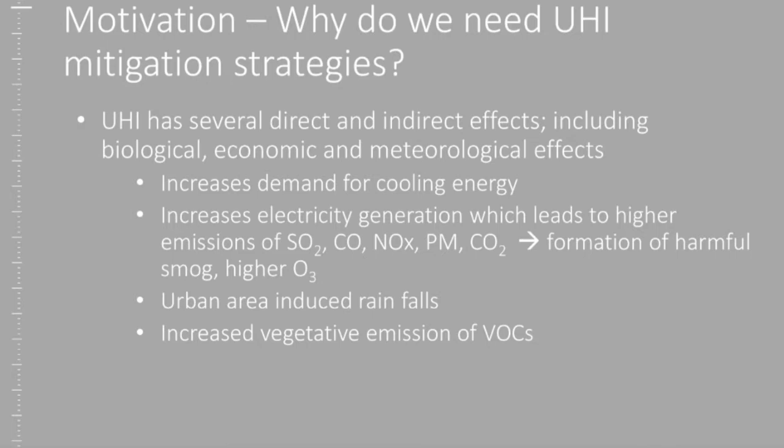And of course you also have increased biogenic emissions of volatile organic compounds. What I want to say is the vegetation we have in the city has evolved over millions of years, and it's not used to living in a city, in this specific environment, but it has to cope with it. We plant it there and expect some kind of benefit from it — we want it to cool down the atmosphere, to have a positive effect on our thermal comfort. But some of the plants don't like it there very much, so they are stressed, and they emit some kind of gases in order to protect themselves. These gases can often be precursor gases, especially in the case of isoprene, that can lead to very harmful construction of tropospheric ozone, O3. You see that a lot in summertime, or here maybe in wintertime, when you have lots of clear summer days — with all the solar radiation coming in, you have lots of production of O3 in the city.

So even if we say, okay, vegetation is one mitigation strategy we know already, we have to carefully think about what kind of vegetation, and in which sense do we implement it. And of course a city is not equal to any other city — Sao Paulo is very different from my hometown, Mainz, but it's also very different from other cities within Brazil. This is the approach of microclimate: we do not have easy solutions for a complex problem, and we need to account for that.

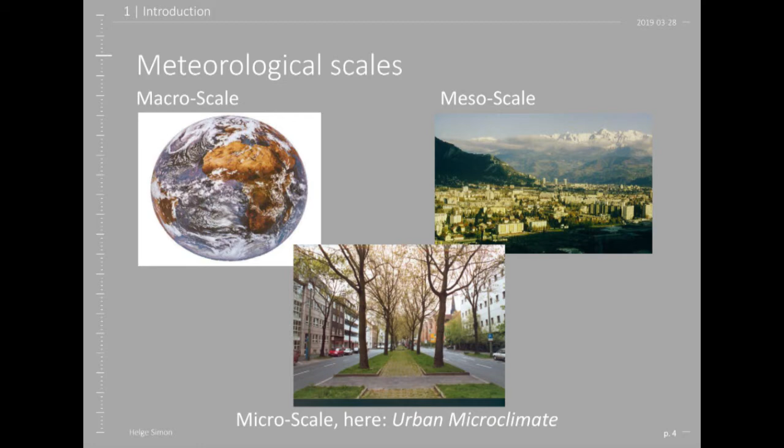So the microscale is the place where we live, and it's also the only place where we can make a difference towards global climate change. We cannot implement something on a macro scale easily. We cannot cool down all the oceans immediately. We don't have this kind of technology.

Maybe you've heard of some proposals to put huge mirrors in space. This sounds a bit futuristic, sounds like science fiction, and is of course very dangerous. There have been some articles recently about this.

So currently we don't have the technology to interfere with these scales, but we all have the chance to interfere with this space, to change the microclimate differently, to shape a better microclimate in our city quarters. This then goes back to the mesoscale because it changes the city quarter, and if you have many city quarters with a better microclimate, then we have a mesoscale feature. And if we've fixed a lot of problems on the mesoscale, it will propagate back to the macroscale.

So we really have to think of the microscale. Don't get turned down by the word micro - it doesn't mean it is micro important. It is macro important, but micro only in scale of dimensions.

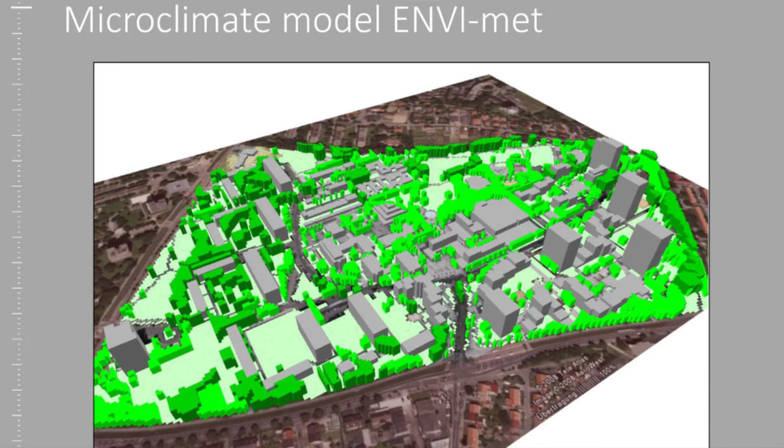So I want to quickly talk about a microclimate model that I'm part of the development team for. It's called ENVI-met, Environment Meteorology. You see a model area here, and it is basically a bit like Minecraft - you can think of it like Minecraft. You discretize the space in blocks.

These blocks can have different resolutions, maybe 2 by 2 by 2 meters, and then they can either be part of the atmosphere, part of a building, or part of the vegetation, etc. And you're able to replicate your model or your city quite accurately.

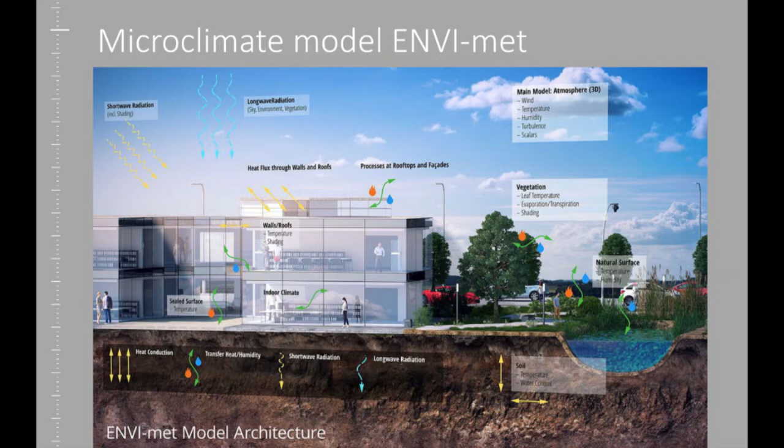And then the model is given some boundary conditions - maybe you want to simulate a hot summer day or something like this. And then the model will give you some prognostic output. It will tell you, okay, given this input and given the configuration inside your model area, you will see distributions of wind speeds, temperature, humidity, turbulence, other scalars, etc.

And in order to simulate very accurately, you cannot only simulate the atmosphere, because microclimates happen because of the interactions between different objects - between the atmosphere and maybe the ground surface, between atmosphere and the building surfaces, and of course between atmosphere and vegetation.

So in order to accurately replicate all these different features, to accurately model the microclimate in an urban area, you have to be able to accurately simulate the processes of vegetation - that being the leaf temperature, the energy balance of the leaf temperature. You have to simulate the evaporation, the transpiration.

So you need to know, okay, a tree is not something static, it reacts to the environment. So when it's too hot, then it closes its stomata - meaning it closes the small openings on the bottom side of a leaf, letting out less water.

Also it reacts, of course, to the soil. So if there was no rain for a long period of time, the soil gets drier because the vegetation is sucking water out of the soil. But at some point we don't have a replenishment because rain is maybe lacking, and then the soil gets dry and the vegetation cannot fulfill all its beneficial effects anymore.

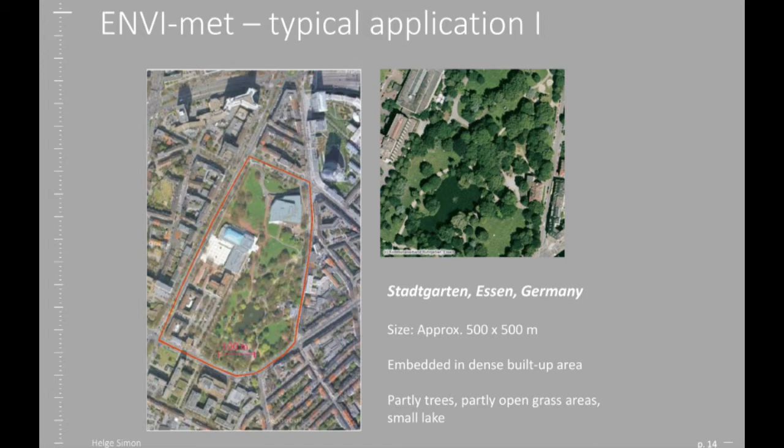So what do we typically have? A model area where we're interested in seeing some effects in the outdoor determined by changes. For example, we have a park here, and we want to know, okay, if I have this park, or if I reduce the size of the park or increase the size of the park, what is the immediate effect onto the environment?

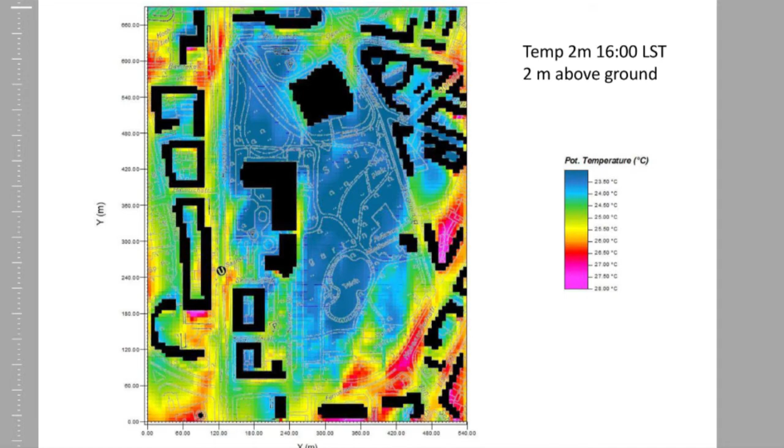We can have a look at the air temperature at 4 p.m., and you will clearly see inside the park you have lower air temperatures, and then on the sealed surfaces close to the buildings, maybe south-facing facades. This is in Essen, a city in Germany. The south-facing facades are hotter than the north-facing facades because they face the sun directly. You see hotter air temperature there. This is a very classical thing.

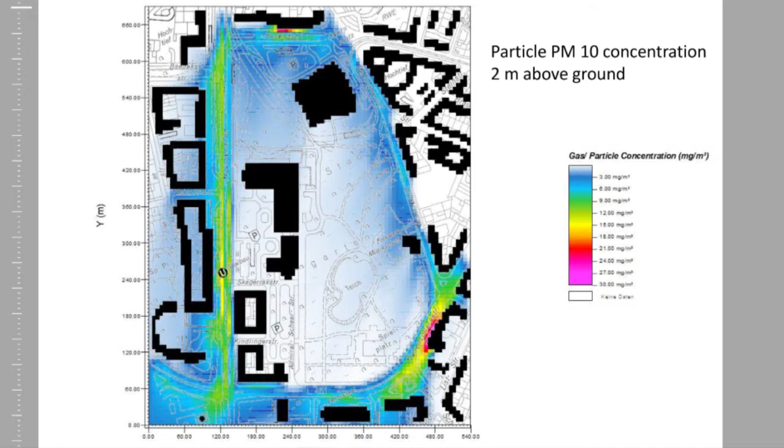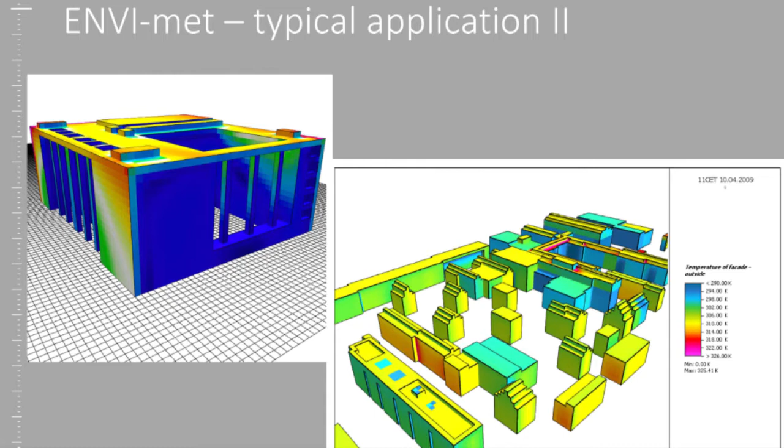There's another typical application where you're not so much interested in the outside, but more interested in the building envelope, the building physics. This means you digitize your buildings with a high resolution. This is a test area of the Fraunhofer Institute in Holzkirchen, and you will see something about this again in a second. So you maybe have a small model area with individual facade elements like glass, then concrete - a lighter concrete, a denser concrete - and inside these buildings you have different flats. This first floor, this third floor is separated into two flats. The second floor, the first floor too. There are two flats inside, so there are distinct air volumes inside.

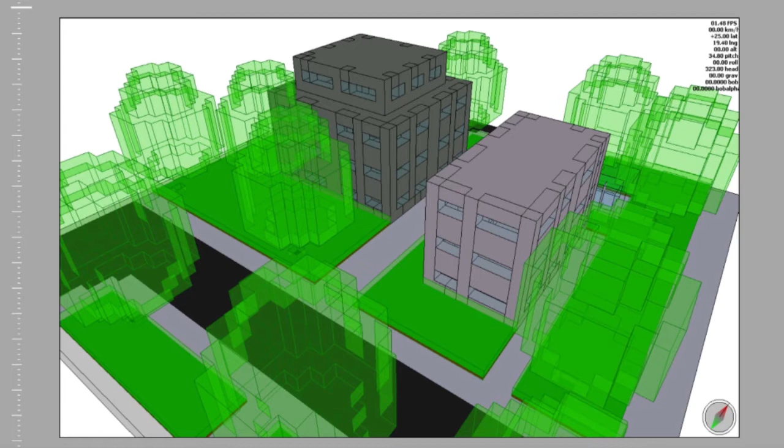When you then simulate, you can first have a look at the outdoor facade. Having a look at the outdoor facade, you see there was a tree in front of this building, and you can clearly see its effect. The solar radiation is being attenuated by the tree, so less solar radiation reaches the facade, and the surface temperature is lower. Then you also have the indoor air temperature, an approximation of the same, and you see all these individual flats carry a different indoor air temperature because they get different amounts of energy and react differently to it.

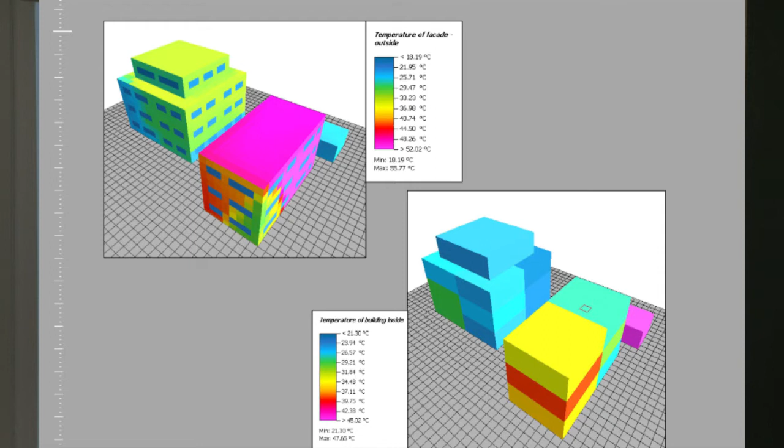Okay, so let's come to these mitigation measures. The mitigation measures I want to talk about are basically two things, and I think these are the two most dominant objects in the city. When you think about a city, you think about buildings - a city is mostly composed of buildings. And when you think about a city in the sense of urban heat island mitigation, you think about vegetation. These two things should be modeled quite accurately in order to quantify how much I can change, how I can shape, how I can better the urban microclimate.

In the first part, I want to talk about the building models, buildings and their role in the urban environment. Then I want to speak about building-atmosphere interaction, and go into the proposition that building performance simulations like EnergyPlus, like Trnsys, etc., can be improved by adding the microclimate, the local microclimate, to them, in order to then improve the outdoor and indoor climate efficiently.

In the second part, I want to go into urban vegetation and show you how a tree, not being a static object in our environment, is shaping the microclimate, and how we can model it accurately in order to give guidelines. Because urban planning is complex - you cannot give them 1,000 numbers, a huge Excel sheet or something. It should be clear guidelines on what to do and what not to do. So we need to model the differences in reaction of different trees quite accurately, and I also want to go into something quite recent that is very important when you do not have a lot of space, because tree vegetation takes up a lot of space. So what about rooftop and facade greening? What are the options here?

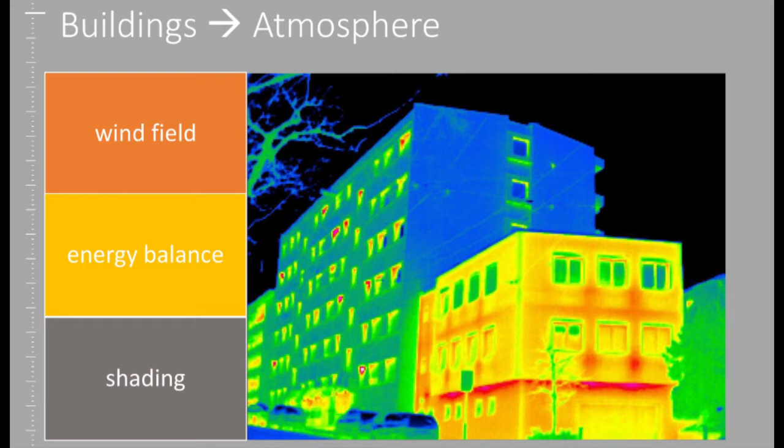Then, of course, comes something very important: cost. For most people it's hard to explain these things, as they are physical parameters, but costs everybody understands. So simulating costs is really important if you want to better the environment, because if you can express something in money terms, everybody will understand it and agree that we have to save money, because then we have more money for other things.

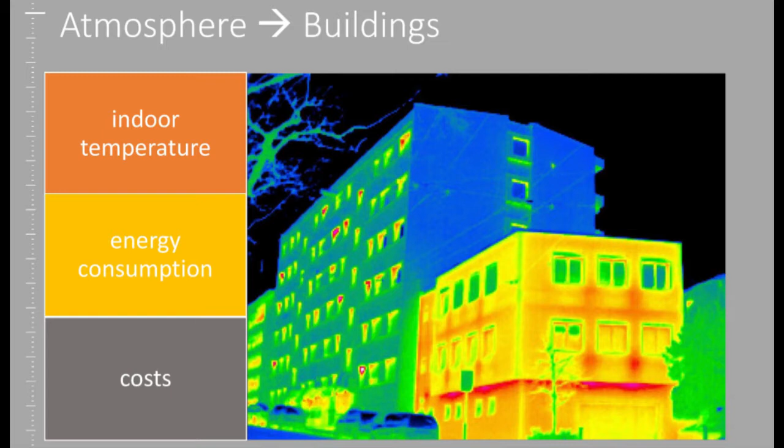So I want to talk about building performance simulations. Why do I think they need improvement? Well, I think they are a great tool, don't get me wrong. They are really good at approximating building energy consumption and the effects of building-related measures, such as more or less insulation, natural ventilation, etc. So they are a great tool and we should use it a lot.

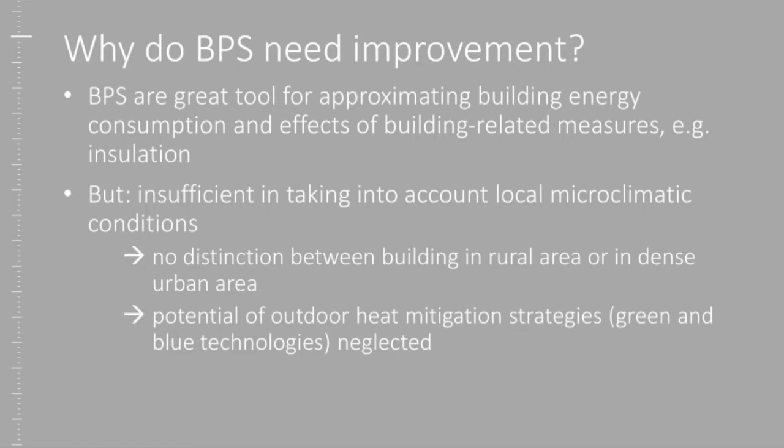But I say they are very insufficient in taking into account the actual local microclimate conditions. What you usually do is take some weather file, a year-long weather file, an EPW file maybe from EnergyPlus, with hourly values for a location, maybe Sao Paulo. You run your building performance simulation with this exact file. But something is a bit weird.

It sounds very easy, and this should make us think: why is it so easy? Is it that easy? No, I don't think it is. Because in these EnergyPlus weather files, there is no distinction about where your building is placed. You only have your building, and then the atmosphere coming from this static file—one file for Sao Paulo. But Sao Paulo has many different microclimates, so why do I only have one file?

It's not taken into account that maybe there are other buildings really close by, that there's a park next to it, or many trees next to it. This is not in there. So we need to improve there.

And of course, if we had all this information, then we could go back again and think: okay, maybe I don't need my AC that much, maybe I can skip some of the insulation, maybe I can use less or more reflective surfaces. So this again has interference with the outdoor environment.

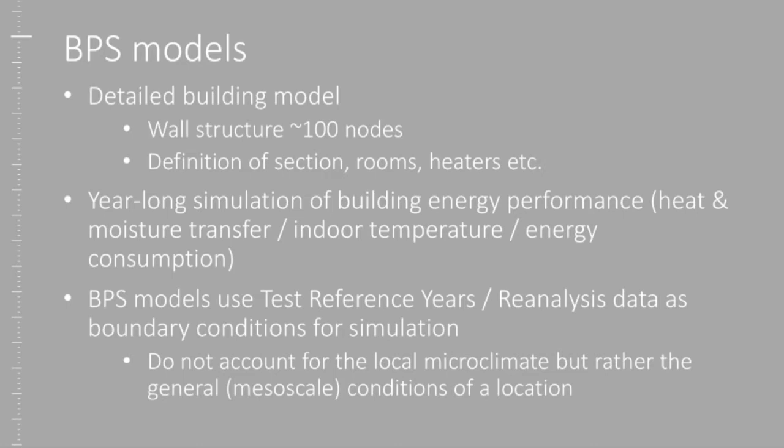Building models are great—they have a high-resolution wall structure, definition of sections of rooms, where a heater is placed, where circulation is, and so on. Using these year-long simulation files, often test reference years or reanalysis data, they're able to run for a full year. But, like I said, they do not account for the local microclimate, but rather a general mesoscale condition. Let's have an example.

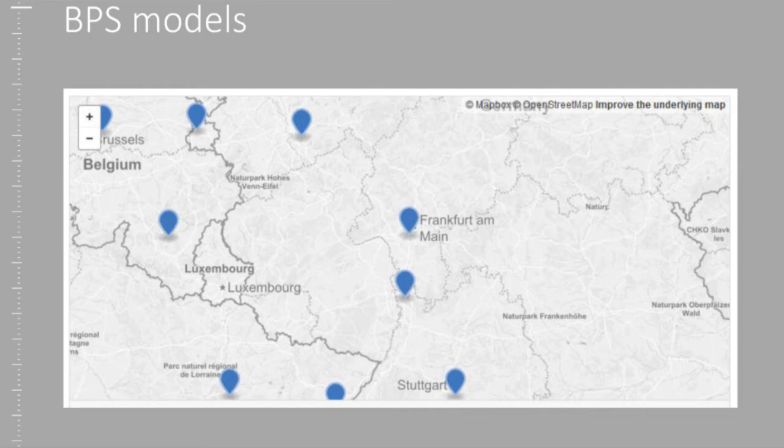So we don't have data there, not for a year-long hourly resolution. I'm not just saying this is a problem—I think it is a problem. But the fact that we have only one blue dot for Frankfurt, or only one blue dot for Sao Paulo, is an even bigger problem, because the really local effects are not captured in this single file.

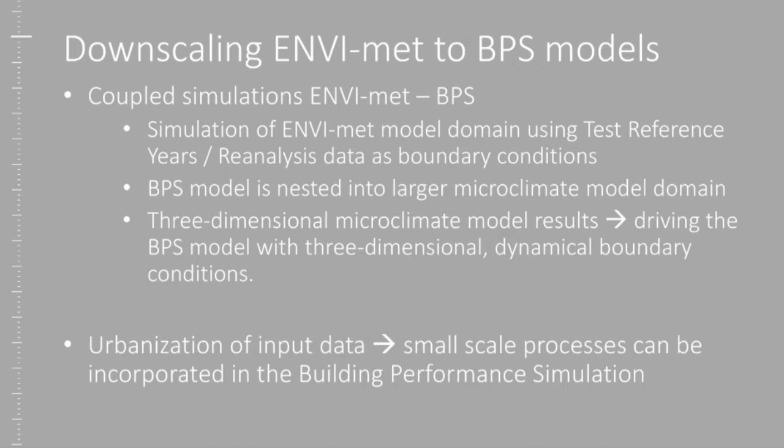So what do I want to do? What is something, I gave you a lot of problems now, but what could be one possible solution? Well, I want us all to think about using a microclimate model running with the EPW file, the blue dot data that now incorporates the mesoscale, the general conditions. You run a model area with a microclimate model, then use the simulation results to extract all the data of the building envelope you want to simulate in the building performance model, and put it inside Energy Plus, Trnsys, etc.

This would be a much better approach. It would lead to an urbanization, or maybe a localization, of the input data. It's not just generic data any longer, but really the data in front of your facade. And not just in front of the south, east, west facing facade, but in front of every individual facade element you simulated. So it's different in the lower left corner of the building than the upper right, and maybe the next 2 meters is very different again because there might be shade from a tree situated nearby.

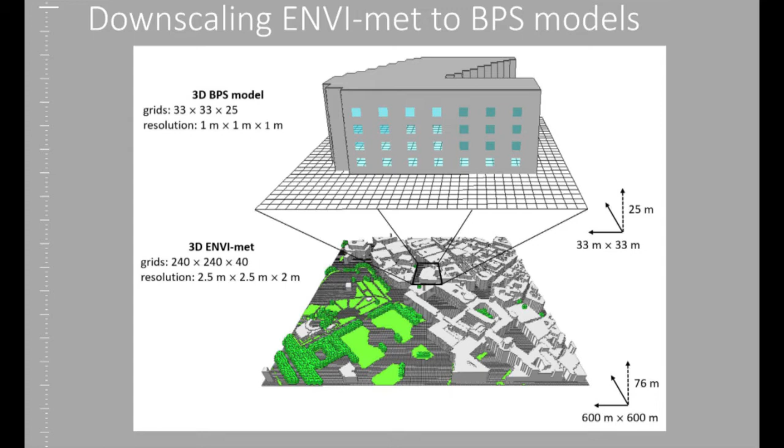So it would look like this. You have this model area, you run this in ENVI-met. And then you have the building that you are simulating in Energy Plus. But before doing so, you extract for every facade element the long wave radiation received, the direct shortwave radiation, shortwave diffuse radiation, the wind speed, the air temperature, the humidity, all the different parameters you need as boundary conditions for Energy Plus.

So that sounds simple. Why hasn't it been done? What is so difficult about this approach? Well, it's two things. First, to be able to extract this data and then use it in a BPS model, you have to simulate the facade, the interactions between the facade and the boundary layer of air right in front, very accurately already.

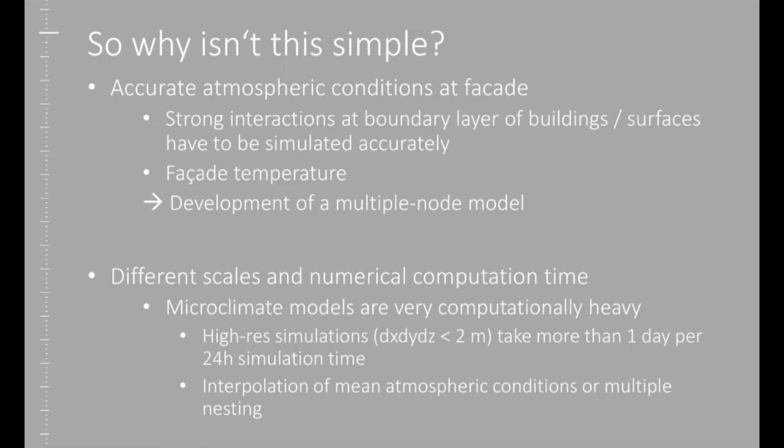Because if I want to use the air temperature as boundary conditions for the BPS, I would already have to simulate it accurately inside the microclimate model, because it's the data I want to use further. So if my facade temperature in ENVI-met is wrong, then the air temperature in front of my building is wrong, and this is the data I put into Energy Plus, so I've won nothing — I just wasted a lot of time. So this is something I first have to do: ensure that the facade temperature coming from ENVI-met is very, very accurate, so that the atmospheric parameters in front of the facade are also very accurate.

And second, we have a very big difference in scale and in numerical computation time. A microclimate model is very computationally heavy. To run a 24-hour simulation usually takes 24 hours, and if it's high resolution, like lower than 2 meters per grid cell, then in order to get a year-long data, you would first invest 1 year. So this is not viable.

But what you can do is interpolate mean atmospheric conditions or use multiple nesting. What do I mean by this? Well, you have maybe a whole year, but many days are similar to each other. I've been here for a week, say Sunday, Monday, Tuesday, and Wednesday — they were very similar. All of the days had no clouds at all, almost the same amplitude in temperature and humidity, and the wind speed was very, very similar. So do I really need to simulate all these days when they are the same?

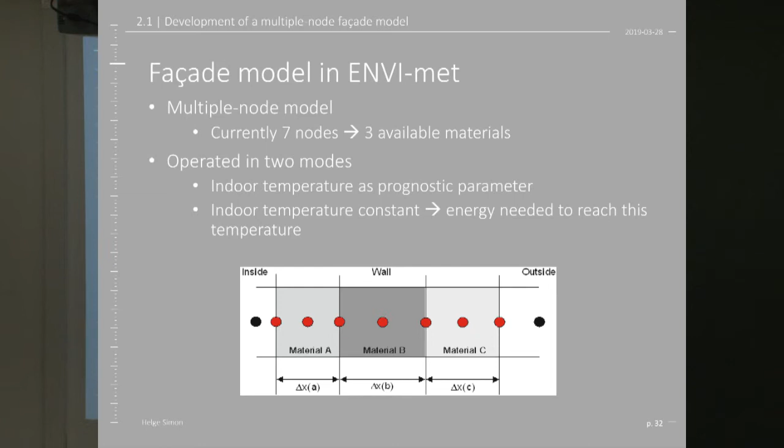We build our walls out of 3 different materials, and the model can be run in 2 modes. You can have the indoor temperature as a prognostic parameter, meaning it changes over time — this would be that you do not have air conditioning, so no regulation. Or you can run it constant, saying your indoor temperature is always 20 degrees centigrade, and then you get an idea of how much energy was needed to keep it constant.

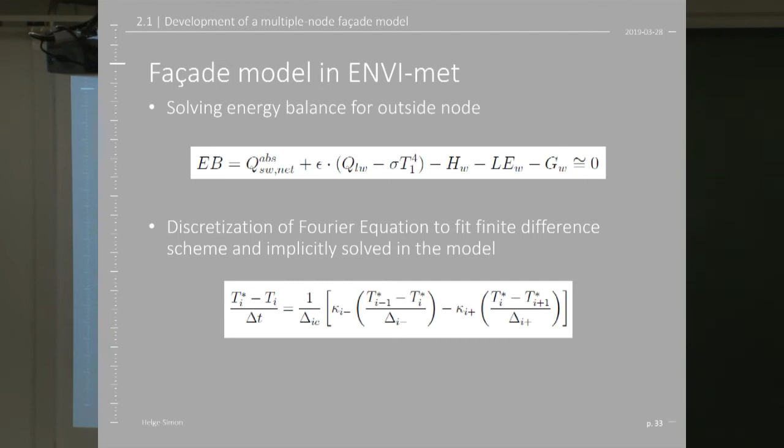And you, of course, have the energy balances that are being used — I don't want to go into them. I just want to show you some results, and these results were undertaken using measurements. We are always happy because we come from the modeling side, but modeling without reference doesn't make sense, so we need people. I'm very happy to have partners here in Sao Paulo who do a lot of measurement, so we get measurement data and then evaluate our model.

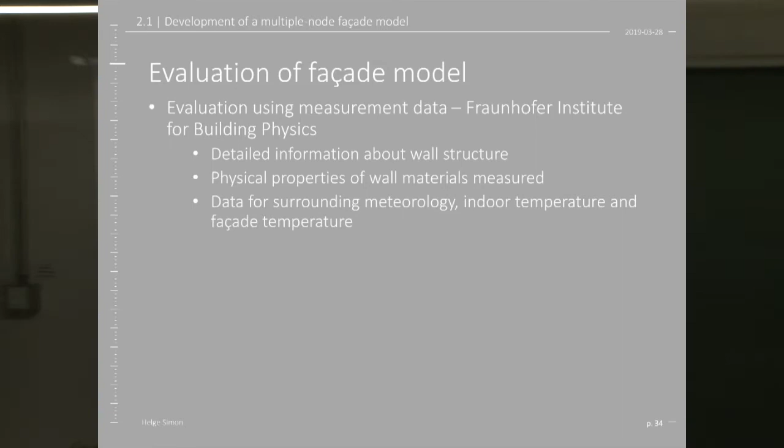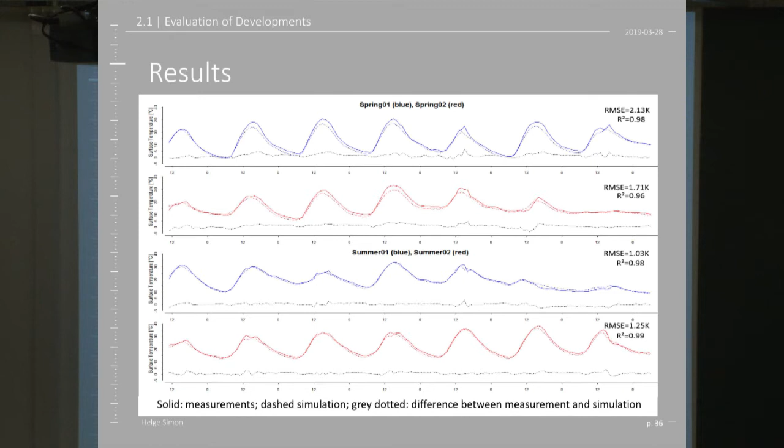So let's have a look at the results. What you see here: the solid lines are the measurement data, the dashed lines are the simulated data, and the gray one is the difference. You see some statistical values up here, the root mean square error and the R square. What you can see is that the model really accurately replicates the facade temperature. This made us very happy, because it means we can go on and use the atmospheric data in front of the facade to move forward with coupling building performance simulations.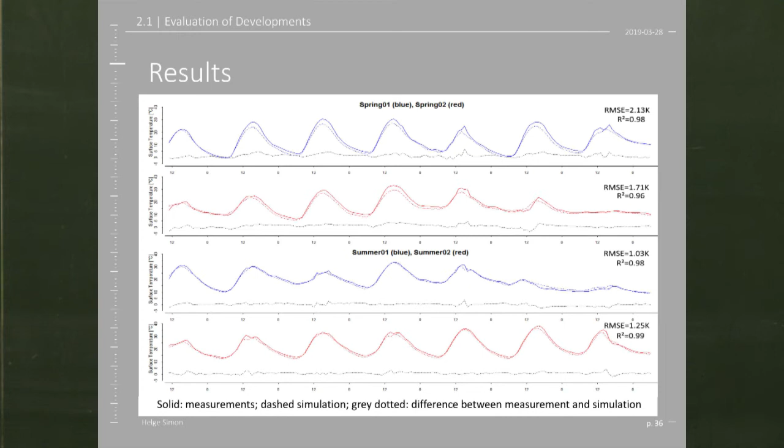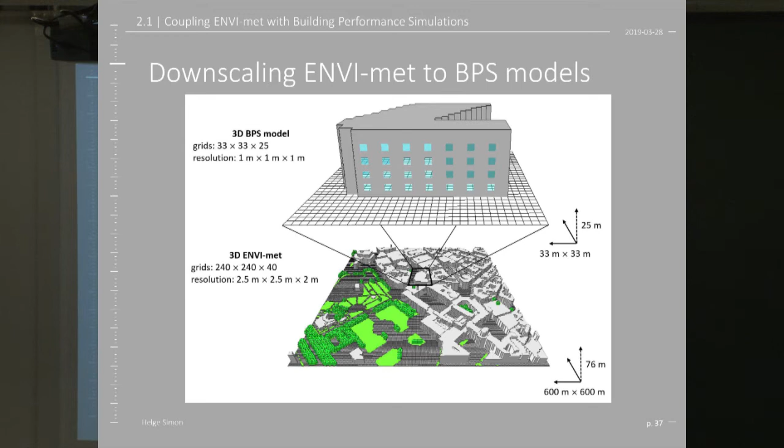So now the downscaling from ENVI-met to BPS models. We did exactly this — we simulated this area and then took out the building envelope for every facade element. What I'm showing you next is what the air temperature would look like if I only used energy plus data versus a coupled approach. For the coupled approach, if I showed you a line for every facade element, you would have a lot of lines in this graph, so I averaged them for the east, west, south, and north facing facades.

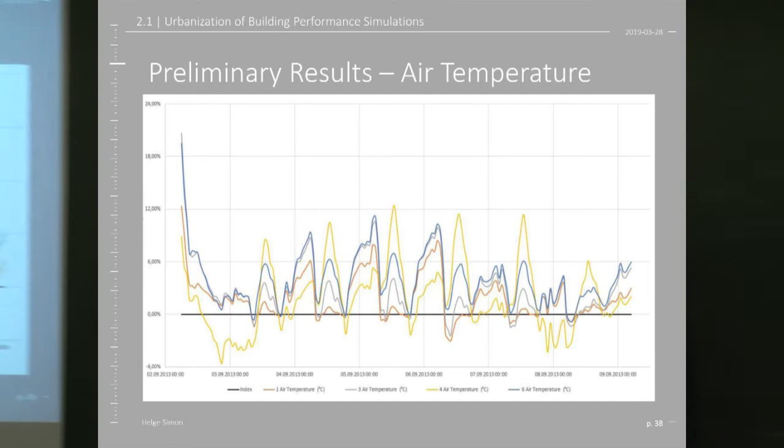You don't see the air temperature as such, but this would be 0%, the reference — what energy plus predicts. The difference from energy plus to energy plus is, of course, 0. You see in percent the differences in air temperature for all the different facade elements, and it's quite significant — it makes a big difference for just the air temperature. And air temperature is not the most important thing; I suspect radiation is even much more important, especially at nighttime, maybe the long-wave radiation reflected from facade to facade.

Let's have a look at the wind speed — these are now absolute values. Black, again, is the wind speed from energy plus. So what would energy plus put on the wind speed onto the building during the period? Well, it's quite high. Of course it's quite high, because the reference stations, the reference locations for the Energy Plus weather files, are often outside the city.

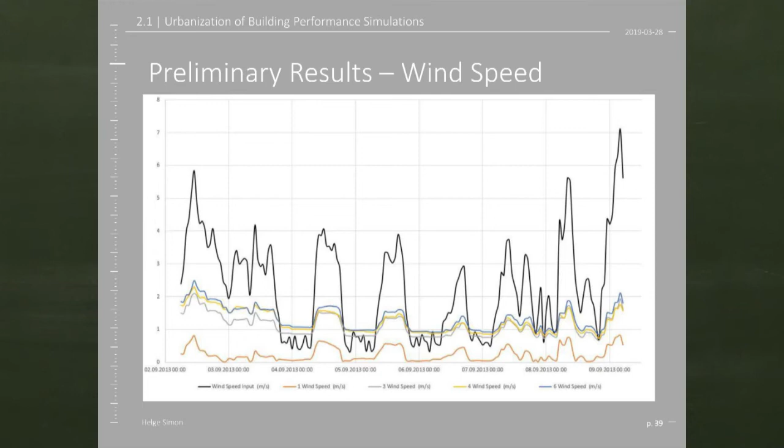They do not take into account the displacement height or the roughness of the city, so ours are much lower and of course much different. This is the downwind facade — you have much lower wind speeds there. So the sensible heat flux is, of course, very, very different.

This, of course, is important for the building.

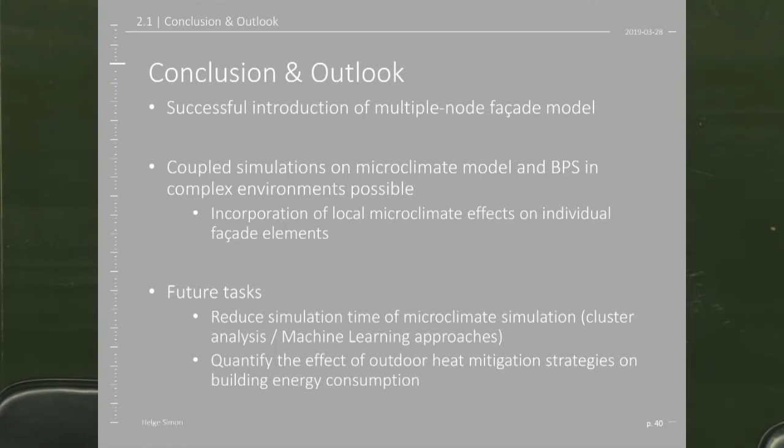Okay, let's come to a short conclusion before I go to the vegetation quickly. We have a successful introduction of the multiple node model, and we could show that coupling simulations, which we only did until now for a short period of time, maybe 10 days or so, showed good effects and significant improvement for the BPS model.

And the future tasks are the ones I told you about. We have to think about this, and I'm happy if I get some feedback from you if you have ideas how to do a statistical analysis properly to separate some days that are very similar and then only model them. We are thinking about cluster analysis, machine learning approaches like k-means, k-forest approaches.

and then quantify the effects of the heat mitigation strategies onto building energy consumption and vice versa. Okay, that was quite long, I'm sorry. Let's go quickly, I promise, into the urban vegetation. What can we do there?

We all know the effects of trees are very important. First I want to show you how we can model trees accurately and what guidelines we can deduce from the results. Then I want to show you some results of work we're currently doing in a research project together with the EU.

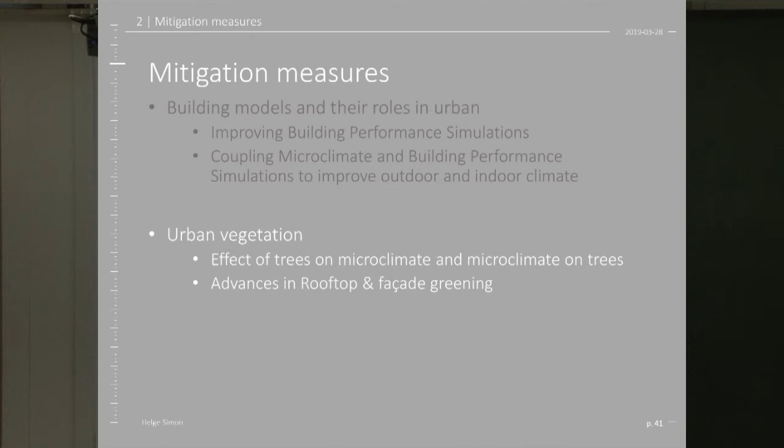So vegetation is also a very important factor in urban areas. This is the latent heat flux, of course, water retention, shading is important. And these are the effects onto the atmosphere, but also different than buildings.

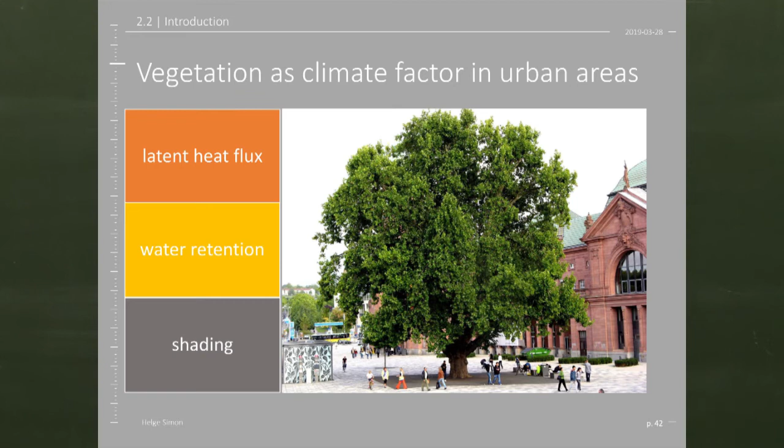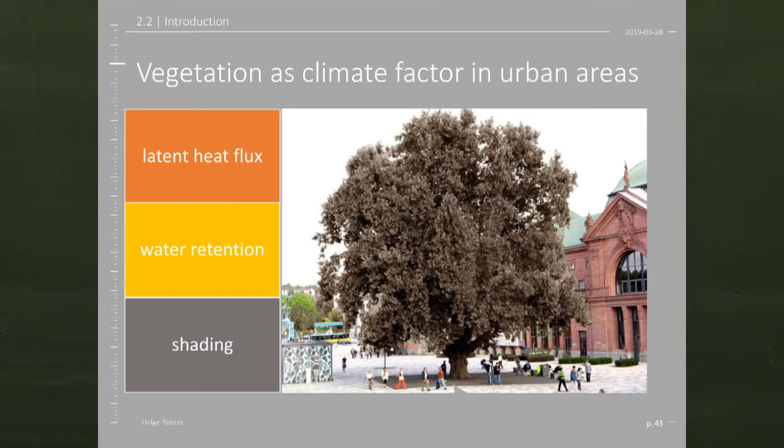You see this is a bit brown now, and it's a bit brown because maybe this tree is not able to survive in this place. Especially for trees that are planted newly, they are not planted when they're already 20 meters big, they are planted when they're small. Small trees do not have huge roots, they do not have a huge canopy, and because they don't have a huge canopy, they are susceptible to too much heat maybe, and they cannot survive. So this is a dilemma.

We cannot plant big trees immediately, but we need trees to survive, and the small trees might die more quickly. And trees are a huge investment. This has not been looked upon much. Only very recently do urban planners understand that trees are a huge investment - you plant them today and they should live maybe for 80, 100 years. So planting them today in the right spot, the right tree, one that is possibly able to survive, it makes sense to first do analysis, not just plant it and see if it survives.

So we also have this relation: vegetation shapes the microclimate, and this is something that has been studied a lot in research - how does vegetation shape the microclimate. But we also have to look the other way around: can this vegetation live in the microclimate? How is the microclimate determining the health of the vegetation? Something we have to have a look on.

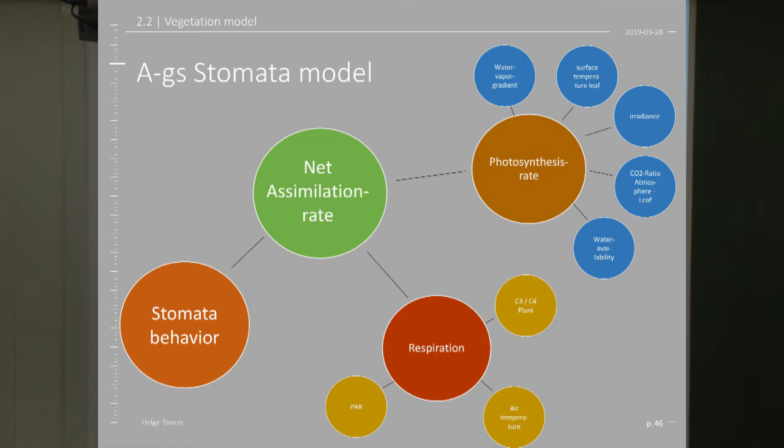So a tree is very complex. I don't want to get into all these bubbles here, but just to simulate how the stomata - these openings on the bottom side of leaves that regulate the carbon intake for photosynthesis and the water coming out for the transpiration process, exactly what we want - how is it regulated by the tree? Well, it's very complex. It has a lot of biological stuff in there, like the respiration, the photosynthetic active radiation, the carbon isotopes that the plant is fixating. And it also has, of course, lots of meteorological parameters. Combining this is the challenge: understanding parts of the biology, understanding parts of the meteorology, and putting them together.

And also we need to think of plants as organisms, and this is something we are guilty of as developers of ENVI-met. For years we thought of plants as individual LAD cells, leaf area density cells, just placed three-dimensionally in our model, not communicating with each other. This is wrong. A plant communicates - this leaf cell is communicating with this one. It is an organism, and it's working together. If the top here feels bad, the bottom will notice. If the soil is getting dry, the whole system will notice. So understanding it as an organism was the first step in order to improve.

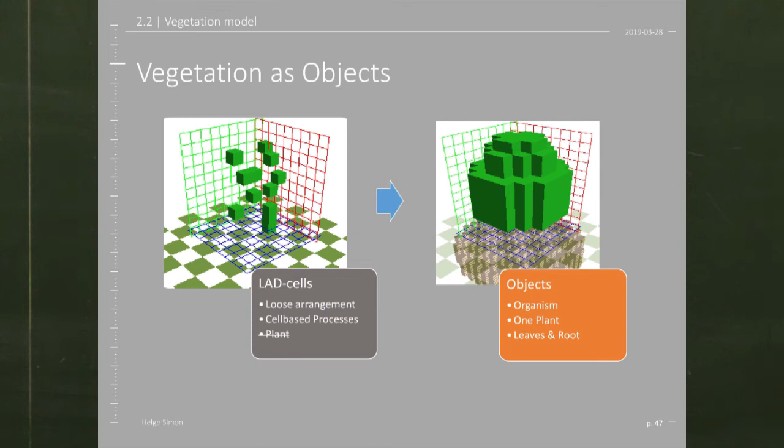And in order to then evaluate our improvement, our remodeling, we had some measurements done.

We evaluated two plane trees. This is in the city of Mainz, in a courtyard. Two different London plane trees, which are very common in Europe. They are deciduous trees, not like the evergreens you have here. And they are different in size.

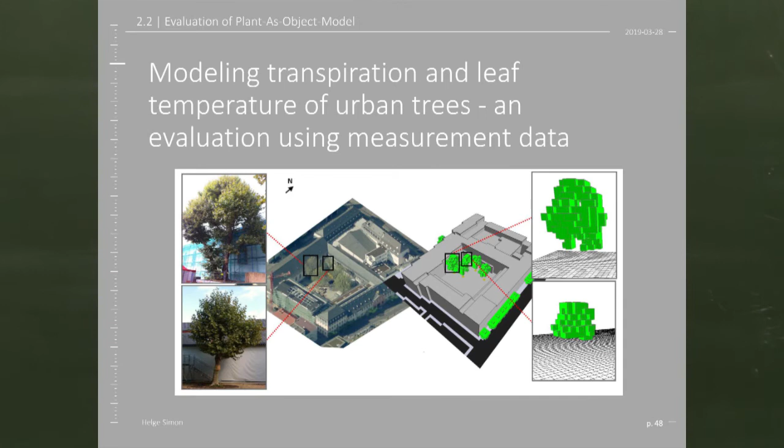We had to take a courtyard, in the middle of the city center, because there's lots of vandalism there. When people are very happy late in the evening in the city and they see some kind of measurement instrument, it might get destroyed. So you have to take care of this, which is why we used a courtyard.

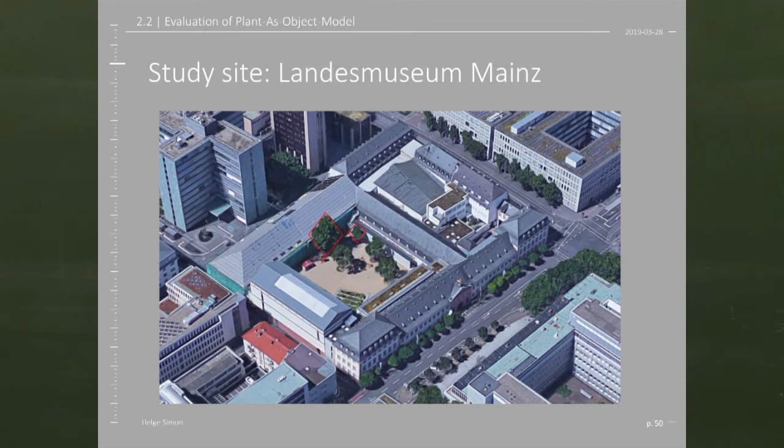What did we measure? We measured two things on the trees. First, we wanted to know how much water is going up the stem. You can do this with a sap flow measurement, where you have a heated needle drilled into the tree. The tree will not be harmed by this, don't worry. There's a heated needle in the middle, and temperature sensors above and below.

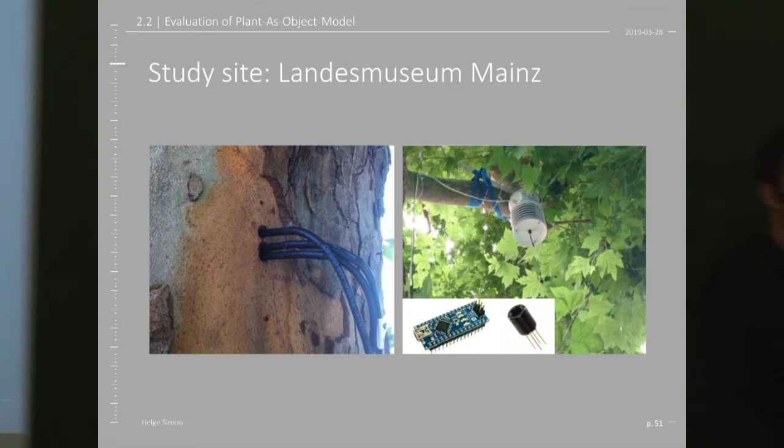If there is lots of water coming up, the water takes the heat with it, so the topmost temperature sensor notices an increase in temperature. From this increase, you can deduce how much water has been flowing up the stem. At nighttime, stem refilling often happens, where the plants stop photosynthesis and start respiration, so you have water coming down the stem maybe.

The second thing is we installed a thermal camera to continuously measure the leaf temperature. We built this ourselves, using lots of Arduino technology. I heard a lot about this here too already, so I'm really pleased about this. I think these are great projects, to build something yourself and create it in order to use it for continuous measurement, very cheap.

So it is continuously measuring the leaf temperature of the trees. We also, of course, need the meteorological data: air temperature, humidity, wind speed, and wind direction, the radiation split into different components. And we measured, like I said, the vegetation data.

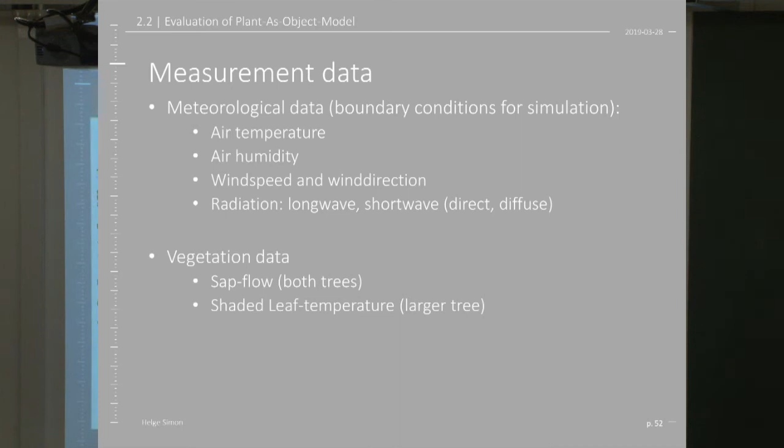Now look at the results. This is the result for the transpiration. Again, solid is measurement, dashed is model. On top you see the small tree, and on the bottom you see the large tree. We measured because for plants, the transpiration process is very important, and so is how much radiation there is.

So we have different cloud scenarios: a clear sky period, a slightly cloudy, a mostly cloudy, and a fully cloudy scenario. Again, you see the statistical values underneath. It resembles very well, the short-term variations, everything. We are very happy about this.

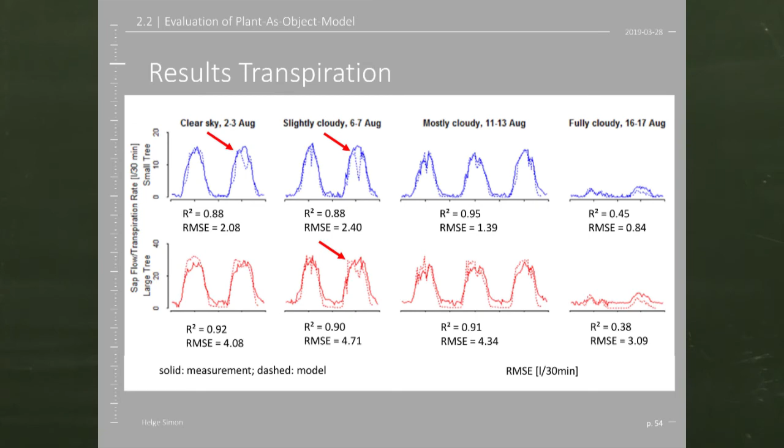But we were not very happy about this here. In the model, the small tree showed signs of what's called a midday depression in transpiration, because at midday there's a depression in the sap flow, in the water transpired by the tree. This is a sign of water stress. So in the model, we saw a water stress situation which we did not see in the measurements.

We suspect this is because in our model the roots did not get enough water, while in reality they do. It is a completely impervious surface, but it is very close to the Rhine River, which has had different flows and been straightened in the past. So maybe it is getting water there. That is an assumption.

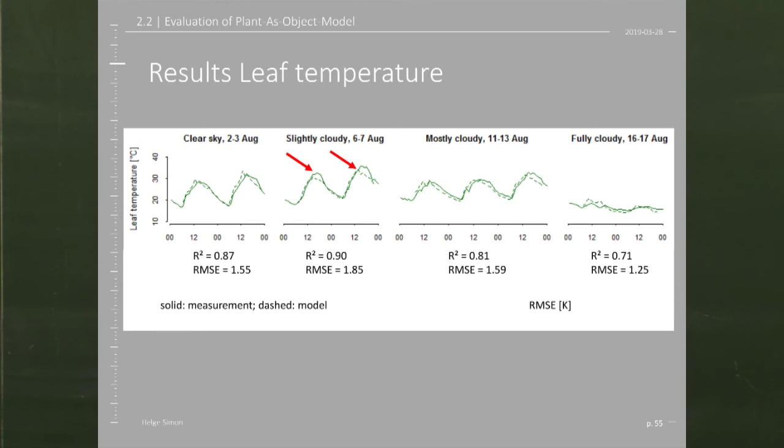When we look at the leaf temperature, you see these two spikes as well. For the other periods, it's quite fine. They, of course, interact with each other: if the plant is not transpiring water, the latent heat flux goes down, so the temperatures are different. So this is what you see in the results of the leaf temperature.

Coming quickly to the conclusion and outlook: we have a high agreement between model and measurement, but we have some idea now about a tree's health.

So we can say, okay, it is able to transpire X amount of water and thus have a beneficial effect onto the local microclimate. But what we have to tap more into is the plant health. It's not just leaf temperature that determines a plant's health.

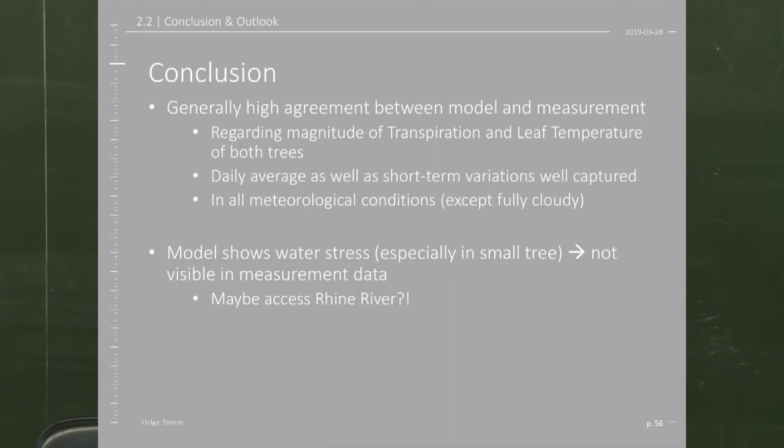We also have to see dangers of mold. If a tree is situated in a place where ventilation is not always there, the water on top of the leaf might not get exchanged and evaporate, so the risk of mold is there. And if trees have enough ventilation or not enough water, some insects come and destroy the tree. So having a risk assessment is something we want - not just wind risk, but also insects or pests.

Determining the wind field matters - we recently had a lot of storms in winter in Germany, and many trees fell. Parts, branches, or the whole tree can fall. It's not just the cost of it falling onto a car and breaking it, though that's also important. The bigger cost is that the tree itself is damaged, because it takes maybe 20 or 30 years until a new tree reaches the same size. So giving ideas of how to cut a tree correctly, so it's not so susceptible to being thrown down or damaged by wind, is something a risk assessment makes a lot of sense for.

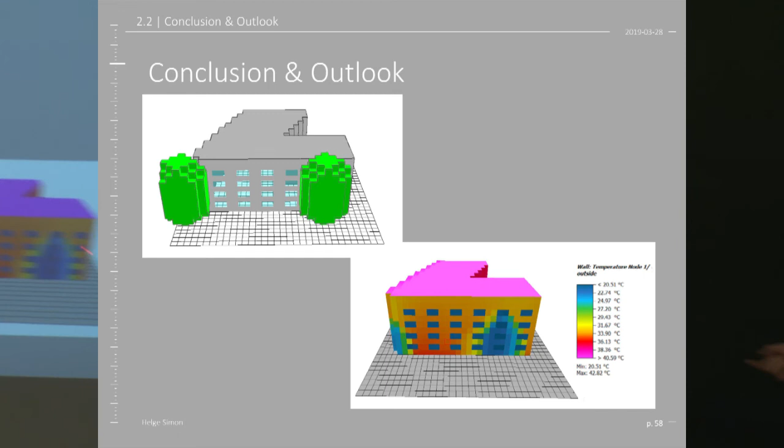So as a conclusion for the two topics I showed you, they are linked with each other. I talked about the building envelope - it makes a big difference to have an individual facade. And if trees are standing there, you see the shade. Trees are not just shading, they're also having all the other benefits we know about, that we want to ensure keep our urban heat island to a minimum.

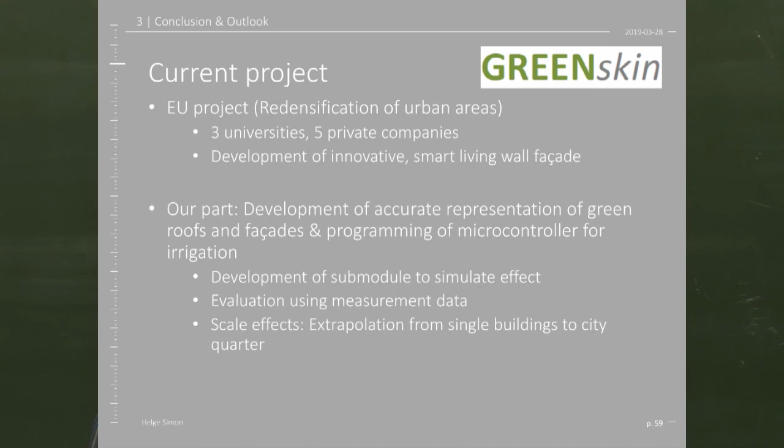In a current project we're also looking at alternatives for greening the city. We are developing innovative smart living wall facades together with 5 private companies and 2 other universities. Our part in this project is to develop an accurate representation of green roofs and green facades. This is very important, because even though we have a lot of money from the EU for this research project over 3 years - huge amounts - we're able to put a lot of information, a lot of measurements, and develop many different facade living walls, putting them onto buildings to measure.

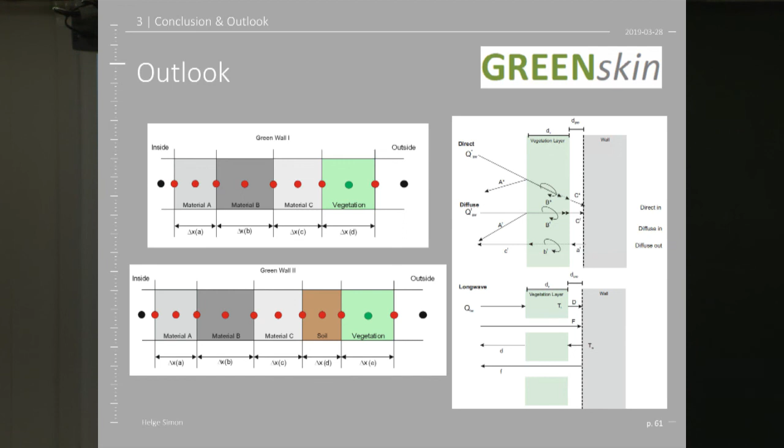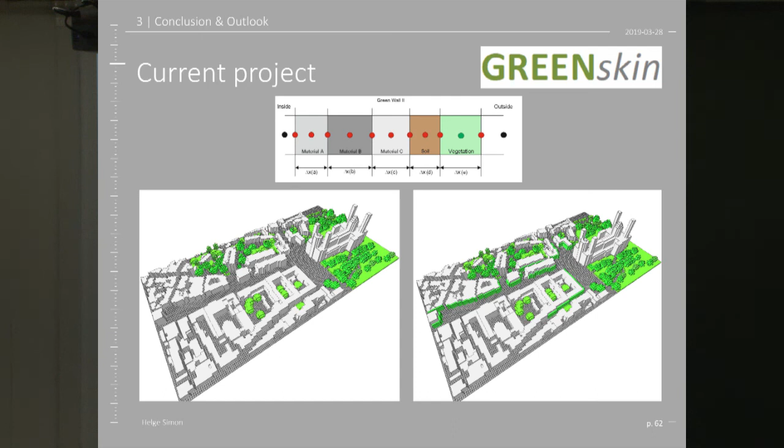Then we want to see, in real life, in our multi-million euro project - we still don't have the money to put these different green facades everywhere and see what the effect is, not just on an individual building, but on the city quarter. That's the thing I talked about way in the beginning - remember macro scale, meso scale - but we are on the micro scale, and this is something we can change. So if it's not a single building with a green facade but a whole city quarter, how does it change? The model can give you a good idea. I think you remember this picture from the poster.